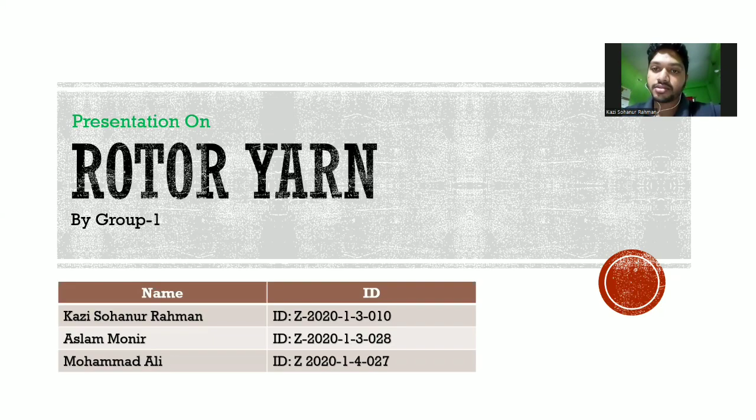Our group members are me, Kazi Sohanur Rahman, Aslam Monir, and Mohammad Ali. Moving to the next slide, please.

Let's start our presentation with a basic question. What is rotor yarn? Basically, rotor yarn, also known as rotor spun yarn, is a type of yarn produced using a specific spinning technique called rotor spinning. Moving to the next slide.

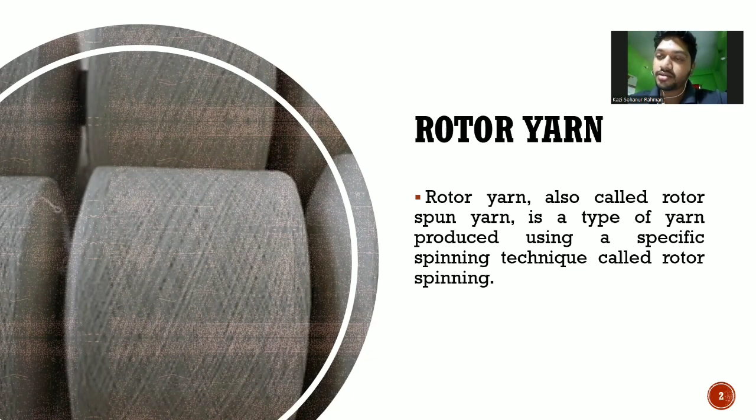Okay, now I will discuss the principle of rotor spinning. In the rotor spinning system, airborne fibers are deposited continuously upon the external or, more usually, the internal peripheral surface of a rapidly rotating drum, so as to form a ring of fibers, which is then peeled off and withdrawn along the axis of rotation of the drum. Thus, twist is imparted and a yarn is formed.

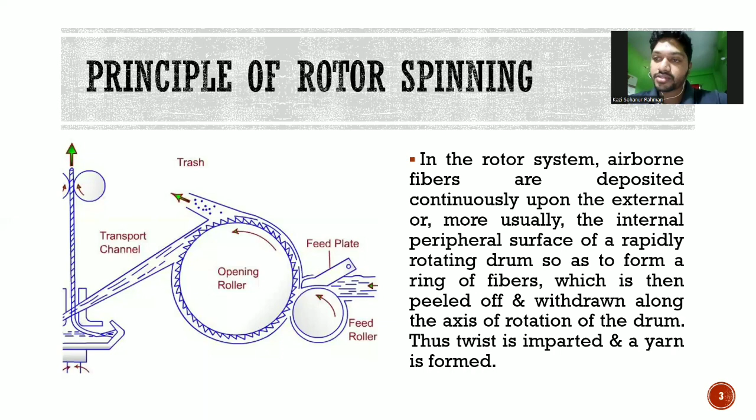Next slide, please. Task of the rotor spinning machine. The rotor spinning machine is unlike any other machine in the short staple spinning mill in the range of tasks. It has to perform all the basic operations, such as opening almost to individual fibers, cleaning, homogenizing through back doubling, combing, ordering, improving evenness through back doubling, imparting strength by twisting, and winding.

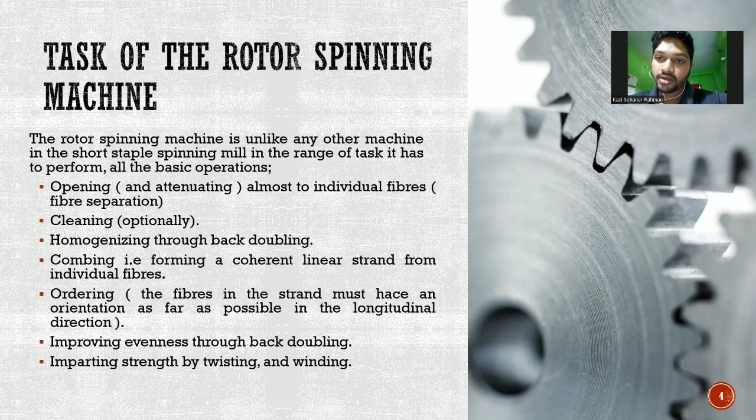Our next topic of this presentation will be presented by Aslam Monir. Now I request Aslam Monir to continue his part. Thank you, Kazi Sohanur Rahman. This is Aslam Monir. I'm from Outsourcing Department.

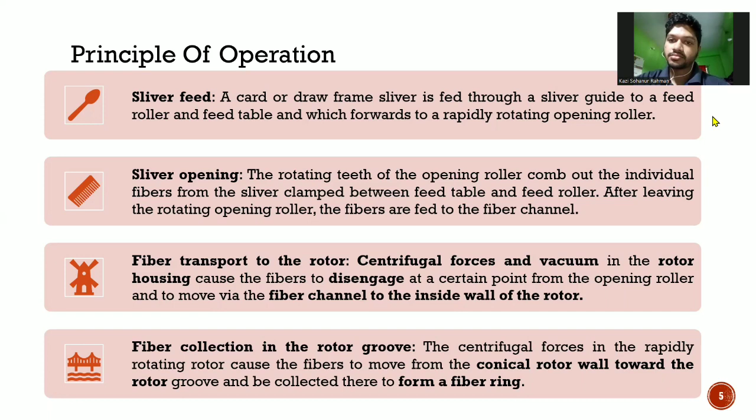Fiber transport to the rotor. Centrifugal forces and vacuum in the rotor housing cause the fibers to detach at a certain point from the opening roller and to move via the fiber channel to the inside wall of the rotor. Fiber collection in the rotor. The centrifugal forces in the rapidly rotating rotor cause the fibers to move from the rotor wall toward the rotor groove and be collected there to form a fiber ring. Moving to the next slide, please.

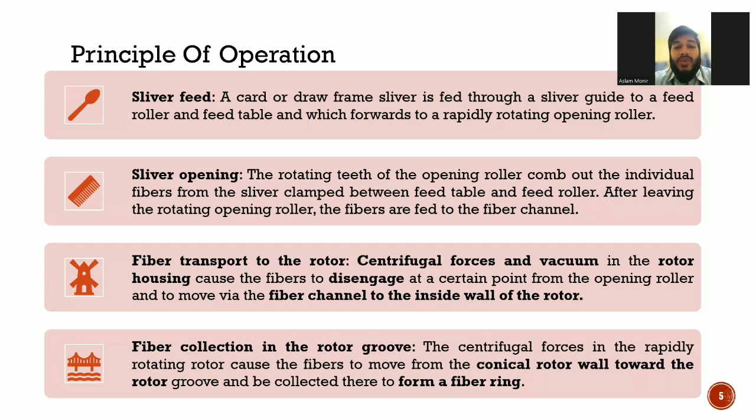Yarn formation. When a yarn end emerges from the nozzle into the rotor, it receives twist from the rotation of the rotor outside the nozzle, which then continues in the yarn into the interior of the rotor. The yarn end rotates around its axis and continuously twists in the fiber deposit in the rotor groove, assisted by the nozzle, which acts as a twist retaining element.

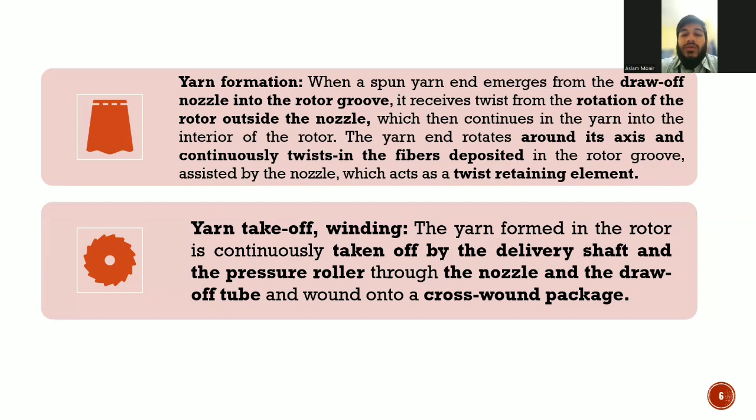Yarn takeoff or winding. The yarn is continuously taken off by the delivery shaft and the pressure roller through the nozzle and draw-off tube and wound onto a cross-wound package. The next slide.

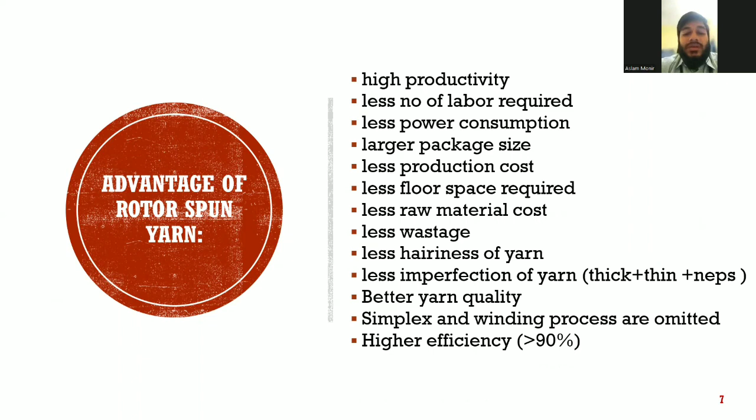Now, next presentation. Next slide. Thank you, Aslam Monir, for your nice presentation. Myself, Mohammad Ali, ID 27.

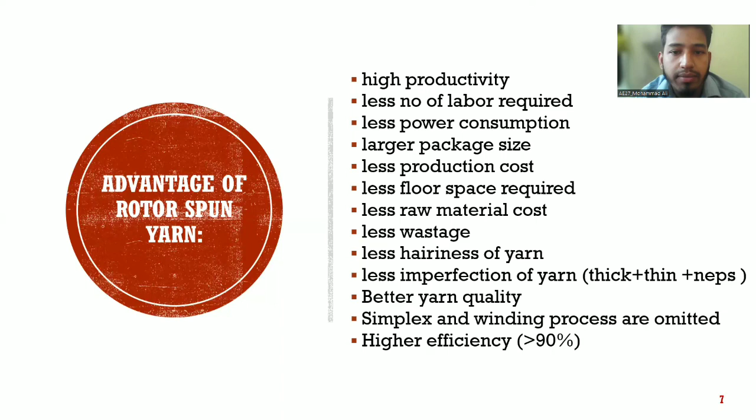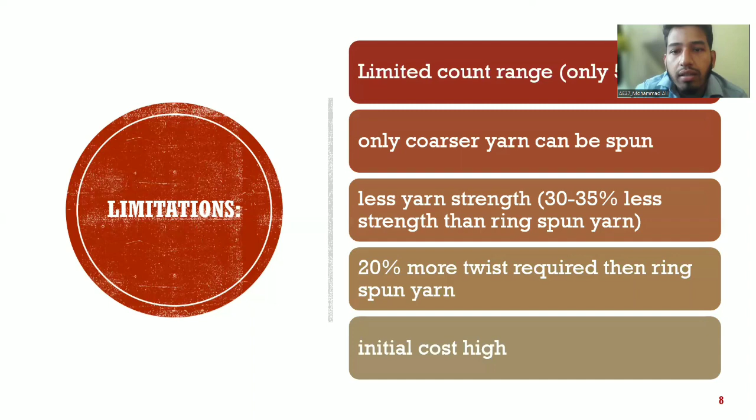Now I will discuss the limitations of rotor spun yarn, which are: limited count range, only 5 to 40 English count. Only coarser yarn can be spun. Less yarn strength, 30 to 35% less strength than ring spun yarn, and 20% more twist required than ring spun yarn. And the last one is the initial cost is high.